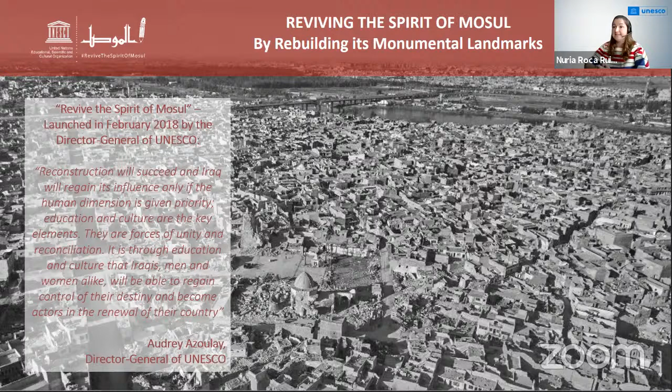There have been several webinars already in this series that spoke about this, but just to put everybody on the same page: the UNESCO initiative Revive the Spirit of Mosul was launched in 2018 by our Director General. It basically has three pillars. One concerns heritage, meaning the physical reconstruction and rehabilitation of cities' heritage sites. A second pillar focuses on education, and a third pillar wants to revitalize Mosul's cultural and intellectual life.

The project I'll be speaking about today is one of the projects within this initiative. It's funded by the United Arab Emirates and mostly falls under the first pillar, heritage, of these three pillars of the initiative. Later on, my colleague Gemma will speak about another project which also falls under the initiative Revive the Spirit of Mosul, but that is funded by the European Union, and it's different from this one. So just to clarify that there are several projects within this Revive the Spirit of Mosul.

The project I'll be talking about is the UAE funded project, entitled Reviving the Spirit of Mosul by Rebuilding its Monumental Landmarks. This project basically aims at rebuilding and rehabilitating three landmarks in the city of Mosul: the Al Nouri complex, the Al Tahera Syriac Catholic Church, and the conventual church of Our Lady of the Hour.

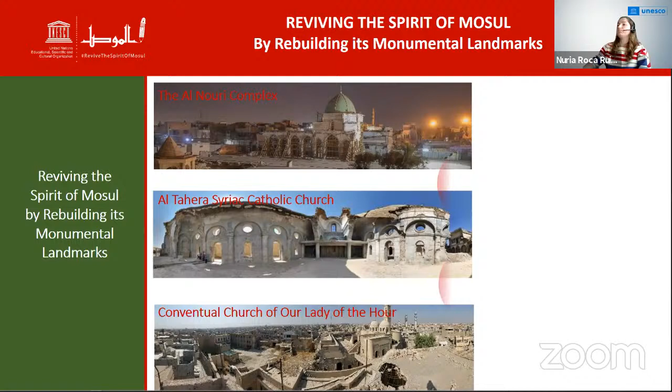It basically has two objectives, or we aim at two outcomes. The first outcome concerns the actual rehabilitation and reconstruction of historical spaces, meaning the physical reconstruction, and how this can lead to reviving the cultural diversity of Mosul, both in terms of human fabric and cultural heritage. A second outcome looks into the skills development and employment opportunities that the physical reconstruction and rehabilitation can lead to.

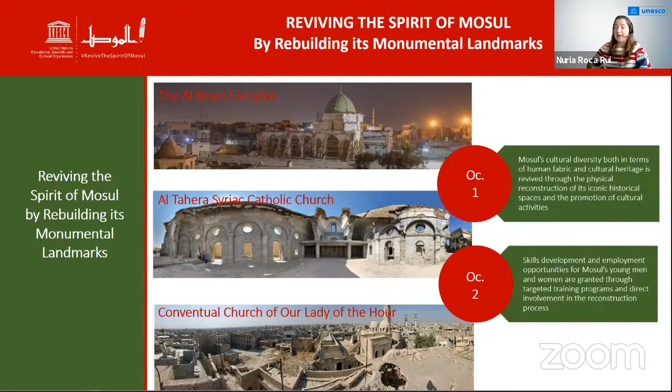So I will start by looking into the first of our important sites, which I already touched on a little with the latest slide - the Al Nouri complex.

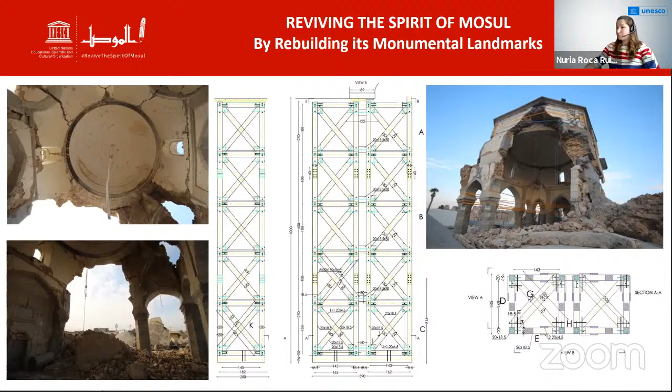For us it has always been very important to encourage job creation and to involve as much as possible local professionals, artisans and workers. In fact, these huge wooden pillars were fully done by local carpenters and woodworkers, and I have to say it was a very complex job, but they were extremely talented and successful in it.

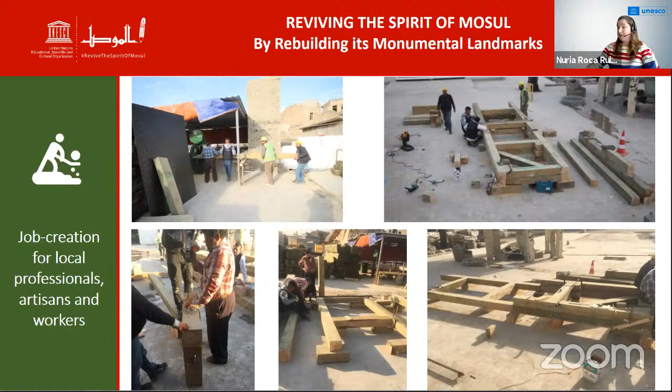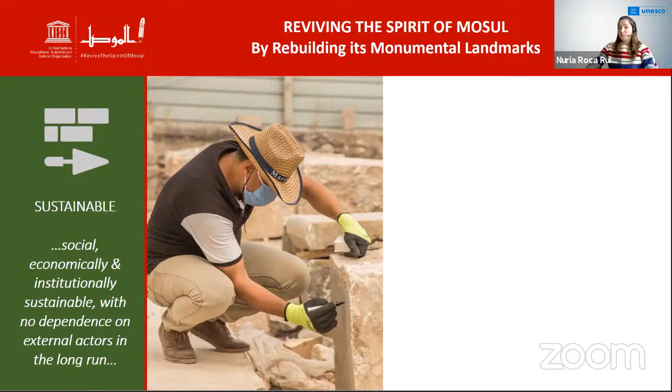Along the same lines, we also work on a daily basis with the different local governmental stakeholders, and especially the State Board of Antiquities and Heritage. You can see here some of its staff.

The SBAH, the State Board of Antiquities and Heritage, kindly deployed highly qualified professionals to the Al Nouri complex, and they did a great job screening the different fragments, assessing the historical value, and cataloging these fragments - of course, the fragments that were recovered from the rubble, etc.

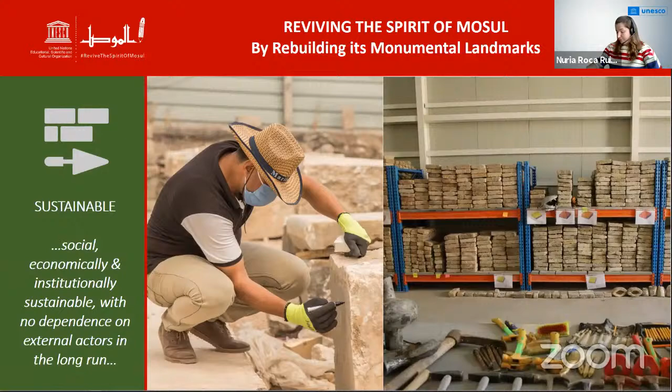And you can see in the images our storage space - a temporary structure built within the complex to host all these fragments. This is a very important step for the next phases of the project indeed.

The result, well, you can see it on the picture. I think the image is quite clear if we compare it with the first image I showed you of the aftermath of the destruction.

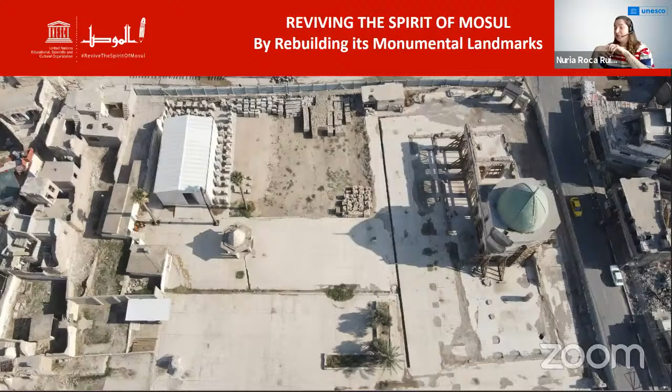Now I'm going to explain quickly the different areas of this complex and how we're planning to move forward. This part highlighted on the screen is what we could call the historical perimeter, or the original perimeter, of the Al Nouri complex. With the dotted line, we are marking the enlarged area of work, which is now the one that concerns our work.

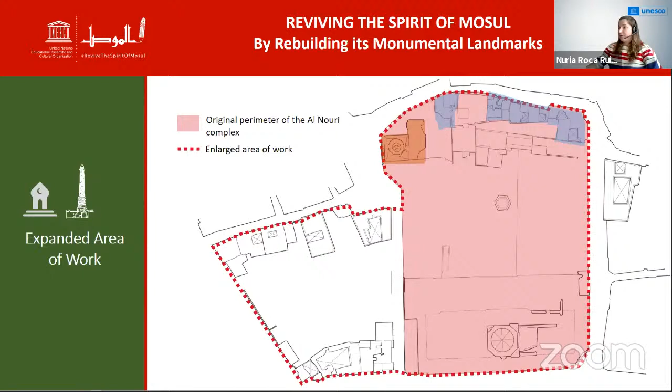In the northern part of the complex, highlighted in blue, those are some houses meant to be residential houses, currently included in a tender package that went out together with other works in the context of the rehabilitation of other historical houses in Mosul, which falls under the EU-funded project that Gemma will cover later on. Those houses will most likely be used by staff working in the complex. Highlighted in orange is the Al-Hadba minaret, which we will cover shortly.

The part that is still in white is the expansion area, currently under a plan of acquisition by the Sunni endowment. This enlarged area of work was, at the beginning of the 20th century, a beautiful neighborhood, but unfortunately these houses were mostly demolished, and only a few are standing. It was converted into a parking lot right before the destruction in 2017. That was a parking lot.

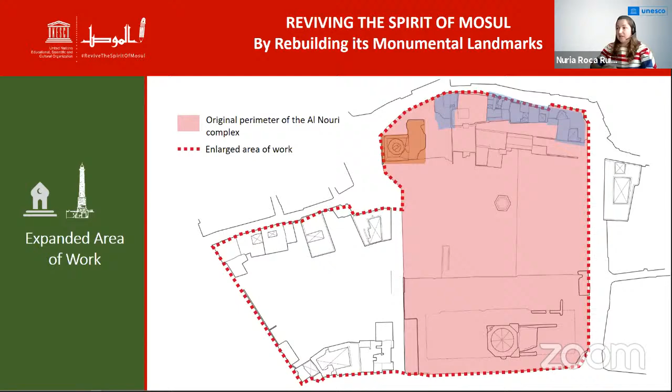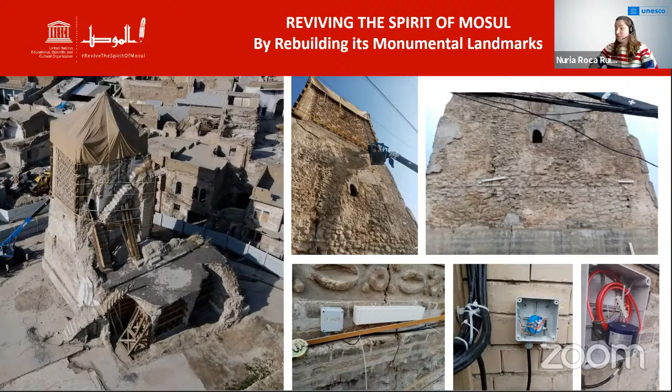So as I said, let's cover now the minaret quickly. I know I'm taking a lot of time, so sorry, but I will try to give you the most important highlights on the minaret.

On the left side of the image, you can see how the minaret looks now after phase one is completed. The minaret is now fully accessible from inside, but I want to highlight that the rubble removal and temporary stabilization was really complex, because the minaret was already, before 2017, in a severe condition of structural instability. After the events of 2017, that made it worse, not better, obviously. But through consultation processes, it was decided that the minaret should be rebuilt how it was and where it was.

That led UNESCO to conduct structural and geotechnical investigations, which are critical to understand the status of the base, and to have the tools to design and rebuild it the best possible way. So what were those investigations?

First, a monitoring system was installed, and you can see some images on the right side of the screen. Here are some graphs, I'll go through these quickly, but we can share the presentation later if anyone is interested. These are some of the graphs from the monitoring system, which monitors the movement of the minaret. I'm happy to say that since November, when we installed the monitoring, it seems the minaret is stable, and there are no major incidents or movements.

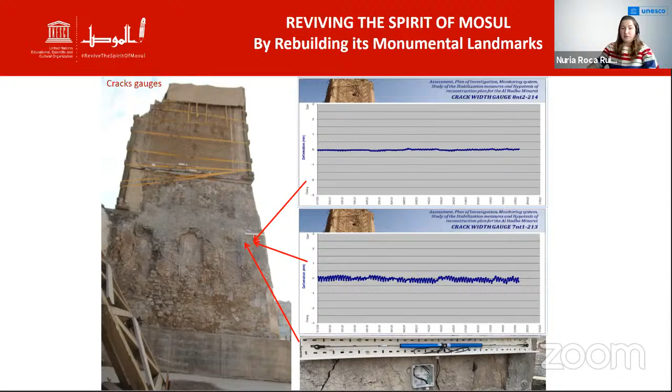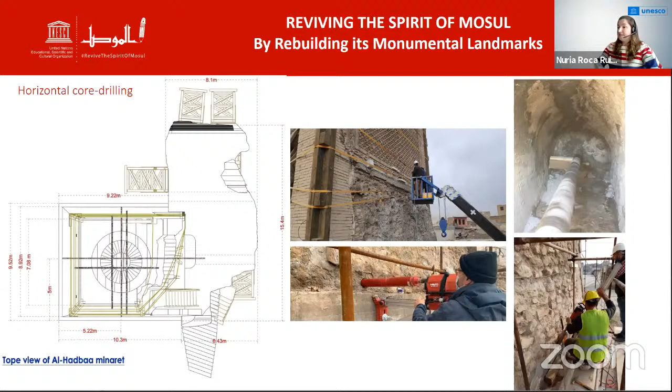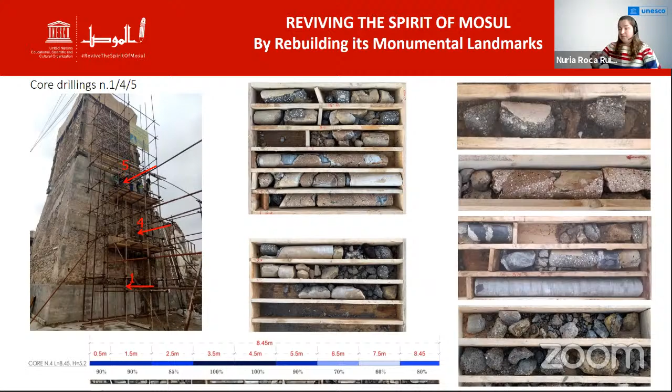The second phase of this investigation included horizontal core drillings, done to characterize the masonry stratigraphy. You can see here some images of the process, and some of the results, where core drilling was done at different levels to better understand the masonry throughout the base.

Quickly, I'm sorry I'm not going into much detail, but just to give an idea of what we're doing, these are some of the results. It's a diagram reporting the differences in terms of materials extracted during the core drilling.

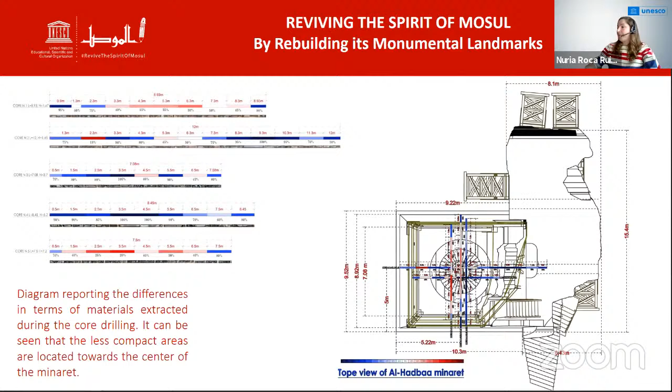The third phase of these investigations was to conduct direct investigations, because UNESCO, through desk review and consultation with local experts, was aware that there were some interventions done, especially in the 20th century, by different teams, but especially the Italian team of Fondedile. The only way to understand what was done was to conduct direct investigations.

Here on the left you can see one of the drawings of the plan for the intervention led by Professor Fondedile in the 80s, and a picture of what has been found in the archaeological excavation, these direct investigations ongoing as we speak. You can see that there were some micropiles placed on each side of the minaret, except on the eastern side, there are no piles there. This was meant to stabilize the minaret because it was already leaning at that time.

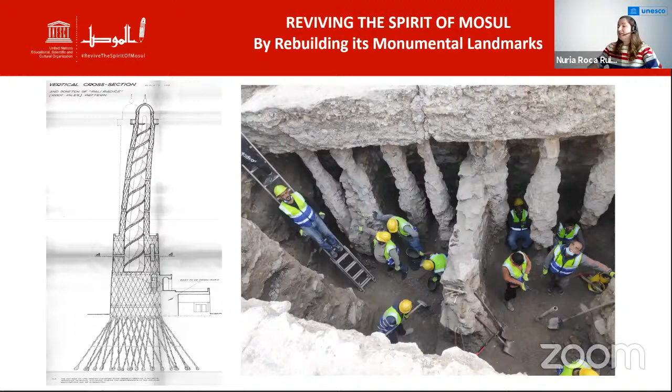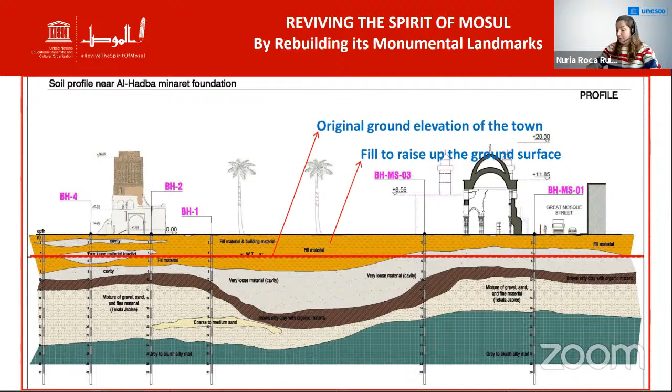Finally, we have also conducted geophysical and soil investigations, which are very important to understand the status of the remains, and lead us to the design of the reconstruction strategy.

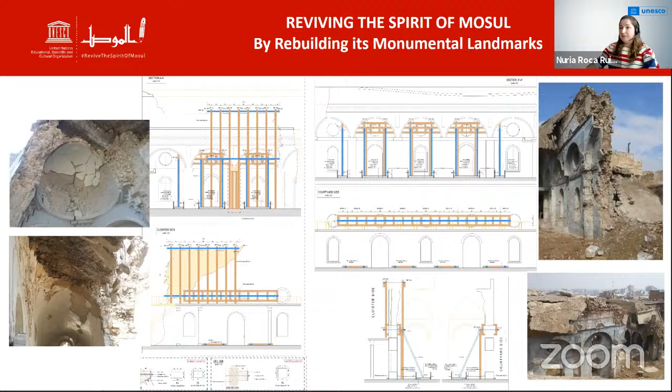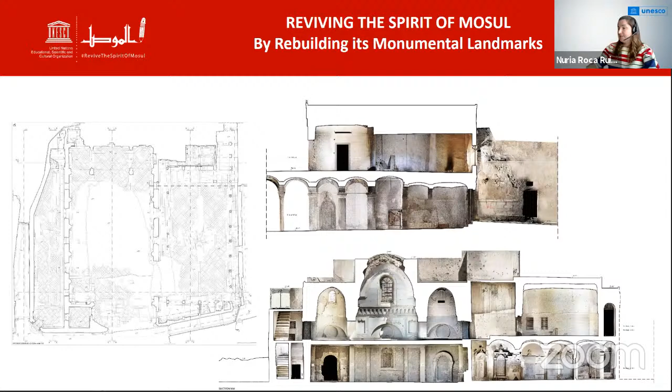As I said, the same procedure, same phasing is undertaken also for the churches. Here are some images of the Al-Tahira church, where you can see the level of damages. Here are some images of the architectural design, and here.

Good. Of course, it's also important for us to especially create a focus on job creation, but also on training and coaching. And we prioritize, of course, consultation and coordination with different stakeholders.

And we tried as much as possible, and this webinar is an example, to communicate and raise awareness about the project and its importance.

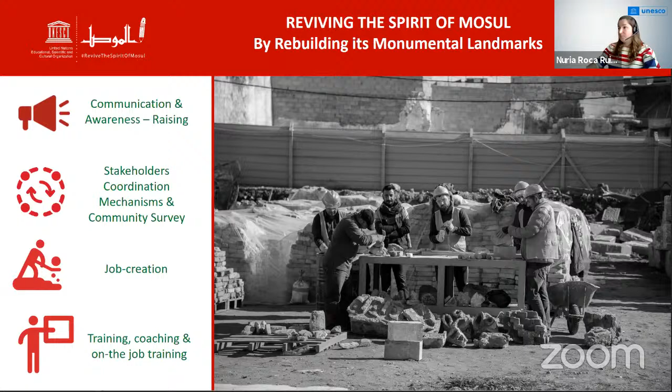We have mostly two main mechanisms for consultation officially. The so-called Joint Technical Committee, which happens at the national level and is attended by Moslawis and Iraqis, different experts in the fields of engineering, architecture, representatives from the local community, University of Mosul, and governmental institutions. And then the Joint Steering Committee, which is the higher committee, the decision-making body of the project, which includes the different ministers of not only the donor, but of course the Ministry of Culture and the president of the Sunni endowments, among others, as well as Christian endowment and the Dominican order for the churches.

These mechanisms happen also in parallel to direct and daily, almost, meetings with the different stakeholders, because, for example, meetings with the State Board of Antiquities, which operates under the Ministry of Culture, happen very regularly at the technical level between UNESCO and the team working in the field.

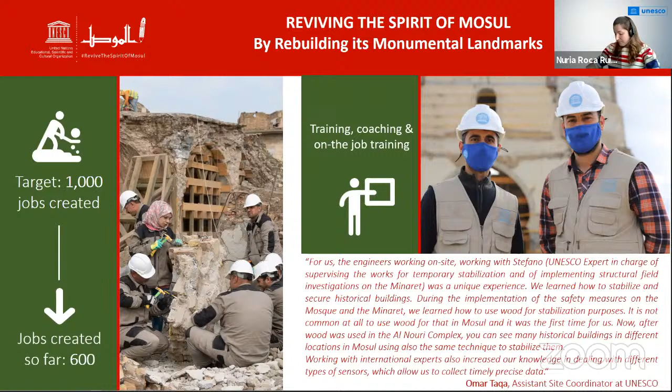Not only is job creation important for us, but also training, coaching, and on-the-job training. On this topic, I would like to highlight a young professionals program for reconstruction and rehabilitation of post-conflict built heritage, that will be launched very soon in the framework of this project in partnership with ICCROM.

This is a 2 year program with 2 tracks, one that targets professionals and another one that targets rather artisans and handicrafts. Maybe Gemma can also elaborate on this, because it's a cross-cutting program of the initiative and not only the UAE funded project. And so that's it from my side.

I will be happy to answer any questions. Thank you all, and I hope you enjoyed.

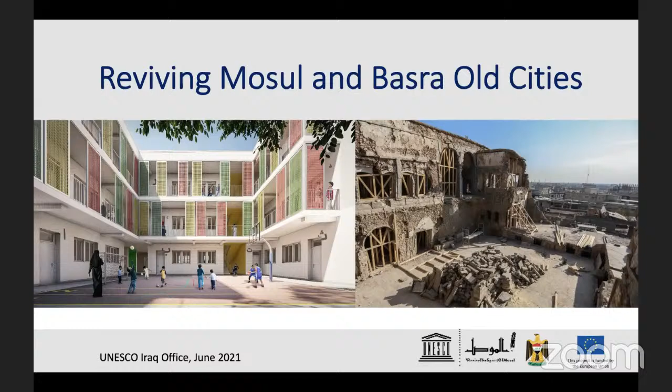So the overall objective of this project is really to contribute to economic recovery, essentially through job creation as well, skills development, and training for vulnerable youth in heritage reconstruction.

To give you a background and show you the context, between 2014 and 2017 was one of the largest urban battles probably since the Second World War, which took place in Mosul. This resulted in mass destruction, affecting around 80% of the city's physical infrastructure, with an estimated 5,000 buildings in the old city of Mosul completely leveled or severely damaged. So that meant there was a significant loss of integrity within the historic core. However, there is still much remaining in which to rebuild, and we want to preserve the integrity and historic character.

The old city of Mosul is actually on the tentative World Heritage List as well, so we also want to preserve that character as much as possible.

We initially started with a detailed analysis of the old city to understand the architectural features and characteristics of the houses specifically. The study revealed that most of these houses date back to the early 18th century. However, recently we actually found a stone integrated within one of the houses from the Atabeg period. So that's quite interesting.

So the houses reflect a lot of characteristics of Islamic architecture, which really respond to climatic conditions, social requirements, religious principles, and economic conditions. The study reveals a lot of hidden features and highly decorative elements that were inherent in Mosul. One of the main features we are looking at is the use of alabaster marble, which is used to frame various elements such as doors and windows, etc. So you can see the level of density and destruction from the picture on your screen.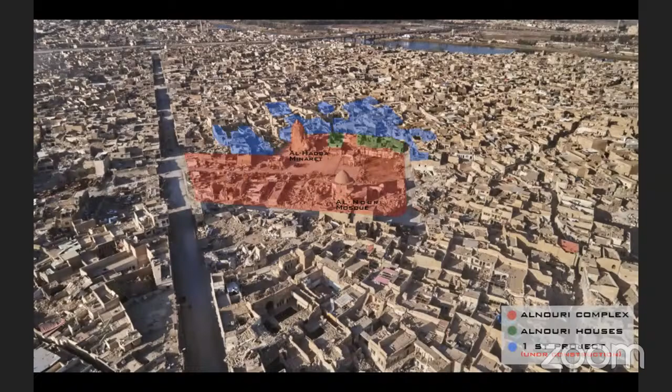So with a better understanding of these architectural features, we started to think about where it was within the old city itself that we would work. So we decided to start with the area surrounding the Al Nuri complex, which we would refer to as an area like a super block, for example.

The Al Nuri complex is in red, and all of the blue is our current first phase of our project of 44 houses, with an expansion coming in the next few weeks that will continue on in a more heritage route. It's important to say this is not a shelter project, but a development project that is quite unique to UNESCO, as we're actually reconstructing the entire house, unlike other agencies who are working on core shelter. It's also important to mention that we're not just looking at the historical house itself, but also upgrading the infrastructure around the house.

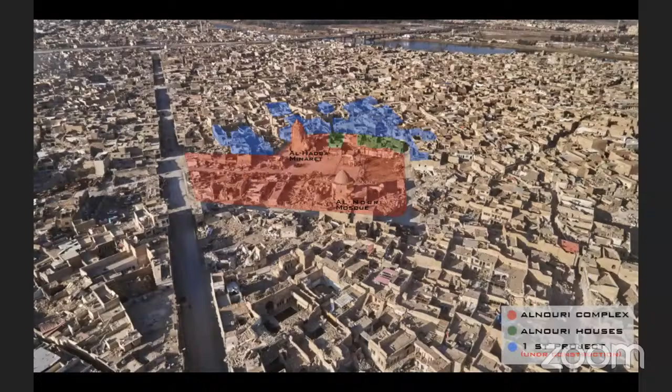So we're looking at the water network, the electricity network, the sewage, the drainage, the paving and lighting. It's not just the houses themselves.

So we face quite a lot of challenges with regards to the sheer amount of destruction and rubble. Unfortunately, we find unexploded ordnances, we at times find IEDs, and unfortunately, morbidly, we do find occasionally some bodies amongst the rubble. And this all has to be cleared.

In some circumstances, even some of the roads need to be cleared before we can get in to do any assessments. This picture shows you the level of density that we're dealing with, but it's important to understand that every site has a unique set of circumstances, and our approach at UNESCO for the houses is very much tailored to the individual needs of each.

The work is complex in terms of the level of damage, and it's not just the damage that's been done as a result of the conflict, but also the degradation of the buildings themselves. So the high density obviously is an issue.

We are using construction techniques to match the old, but have in some ways been forgotten about for generations. We also have modern interventions that have been knitted in as well.

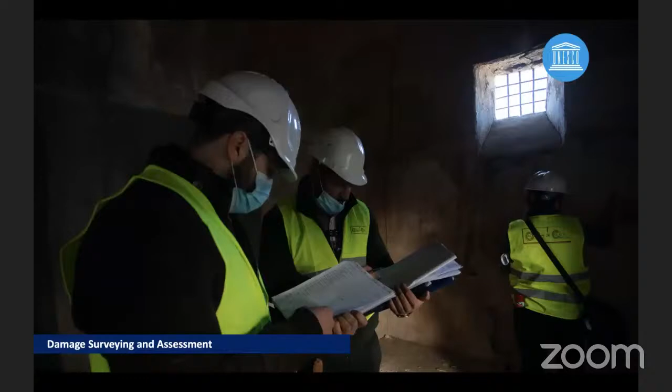Moving on, once the buildings are clear, we can safely get in to do our detailed assessment and analysis, in which we start to categorize each of the historical houses into a damage category. So we'll reconstruct in most cases, unless the house is either completely eroded or completely missing.

Most of these houses surrounding the Al Nuri complex are mostly privately owned, and some are owned by the Sunni Waqf, some are owned by the Antiquities Board. Each detail of repair is discussed with each owner.

For example, with the homeowners, they also are able to choose various options of historical features and the reintegration. This is also further discussed at a local technical level with government stakeholders such as the Antiquities Board, Governor's Office, Water, Sewage Department, Electrical Departments, prior to even going to a tender release phase.

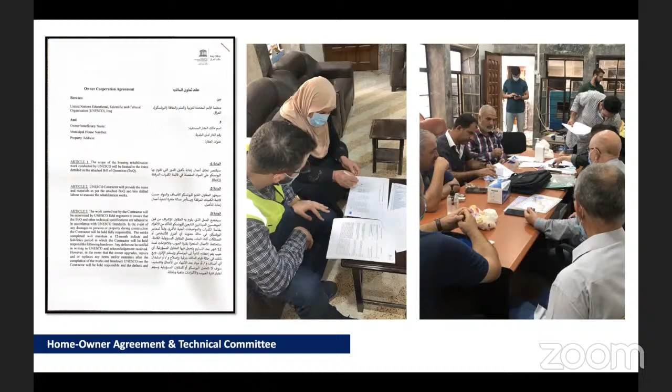So we started the construction of the first package of 44 houses back in December 2020, and you can see some of the photographs of, for example, the old plaster layers being removed, the stone being rebuilt using lime mortar, and some of the domes starting to be reconstructed as well.

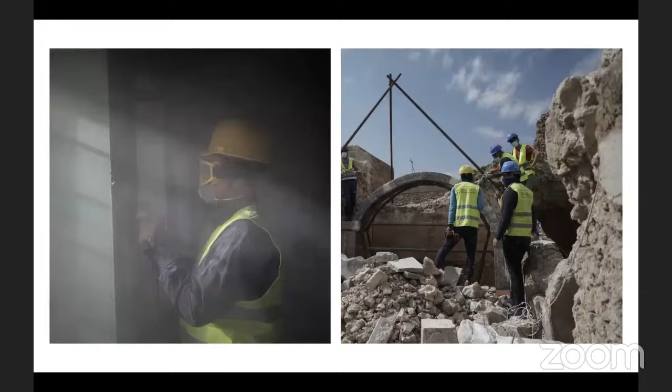These pictures show some of the alabaster elements that are quite special for Mosul. A lot of these elements, unfortunately, over time were covered up or painted. So we're actually revealing a lot of those alabaster components again and celebrating those really unique architectural features.

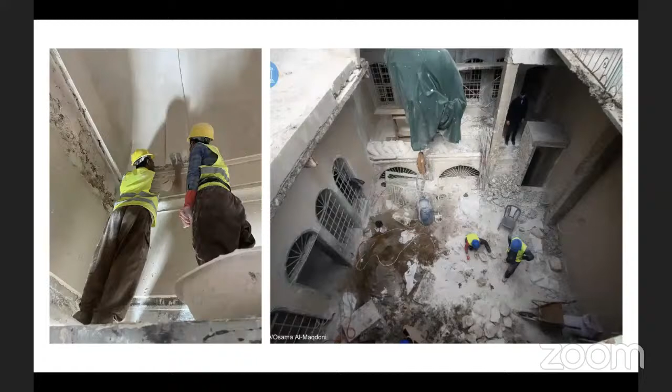This is simply a photograph of typical Islamic architecture, in which everything is based around a courtyard, and most of the houses are quite insular facing, with the external facade having not a lot in terms of windows or openings.

This shows some of our team mixing the lime mortar and then redetailing some of the plaster elements.

You can see some of the trainees have been teamed up with specialist craftsmen to understand and undertake the work themselves. In the picture on the right, we have an expert alabaster craftsman who is filling in some of the damaged parts in different stages.

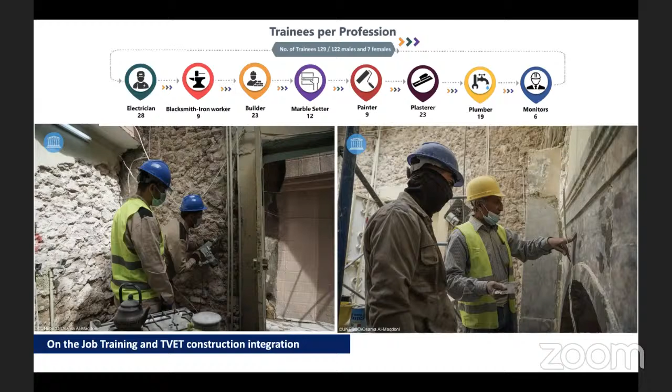So he's teaching some of the local qualified TVET trainees how to do that. You can also see some girls, some of the ladies, have also undertaken the training course and come on site as well. Our electrical engineer was teaching them how to do electrical wiring throughout the historical houses.

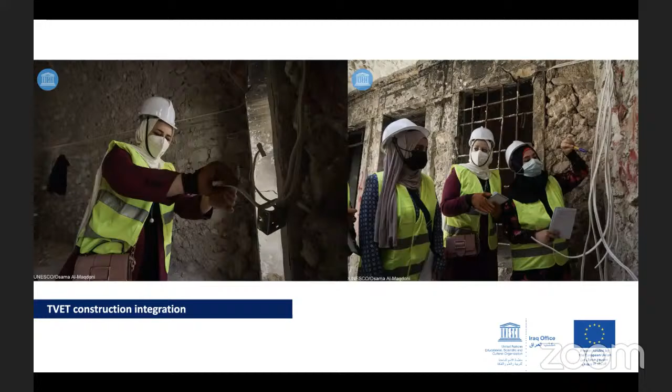I think this is a really good photograph to explain what's happening in detail. Again, some more photographs of our TVET trainees hand mixing some of the lime plaster work and learning how to do some welding on site as well.

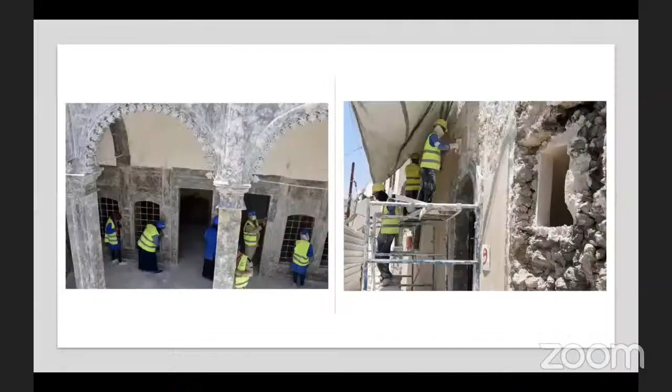You can see in detail here on the left photograph, this is one of our really nice examples of historical houses that has quite a lot of alabaster marble, and a lot of the TVET graduates are starting to repair in situ. This is a bit different in that it's repair in situ rather than replace. This is an interesting challenge that hasn't necessarily come up in construction for Mosul as yet.

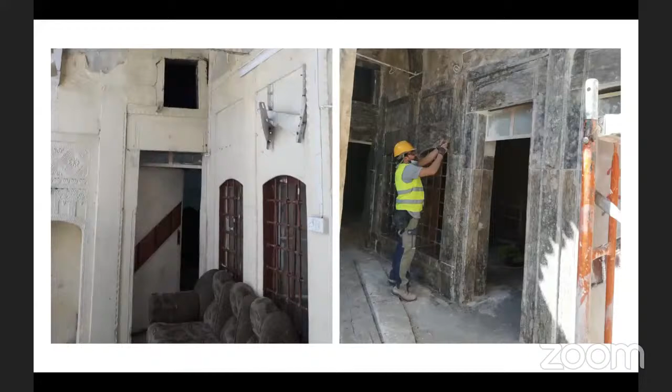This shows you a before and after photograph of how the beautiful historic alabaster elements have all been covered up by paint and various bits and pieces and plaster.

The photograph on the right shows after, in terms of under construction, and we hope that a lot of this construction will finalize by the end of the year. Again, another before and after photograph where you can see all of the really nice architectural elements had been hidden, and so we have started to reveal them and replaster.

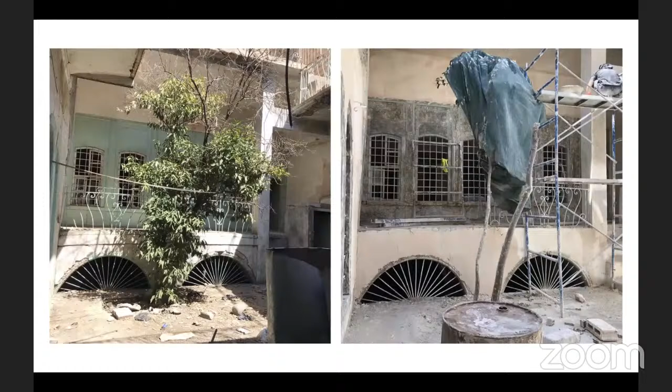We also have a couple of palatial houses which are owned by the State Board of Antiquities. At this stage, they are incredibly large houses that have gone through rubble clearance and a stabilization process, but you can still see the level of damage there. Any elements have been catalogued, ready for reintegration again. So those are going through a stage of design at this moment prior to releasing for tender.

This takes us towards some of our other elements as well, which include a child-friendly school, and in some ways it creates a heritage route. Some of these houses have obviously been reconstructed by other agencies, so we're working in different phases with the European Union to achieve the results we want.

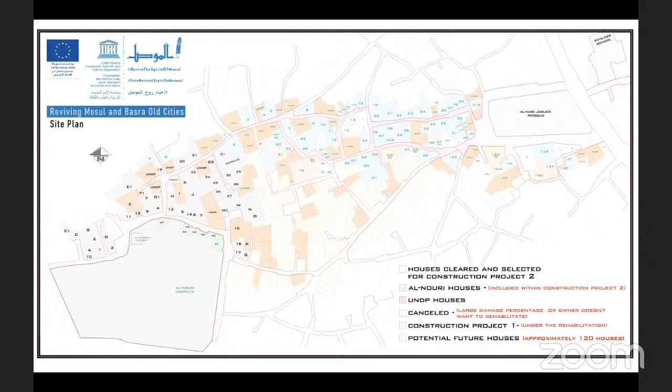The child-friendly school. This is the first child-friendly school in Mosul and potentially all of Iraq. What makes it a child-friendly school is that through the architecture we're able to actively reduce violence and increase academic achievement of children. Essentially, we're breaking down all the components of a typical school in Iraq.

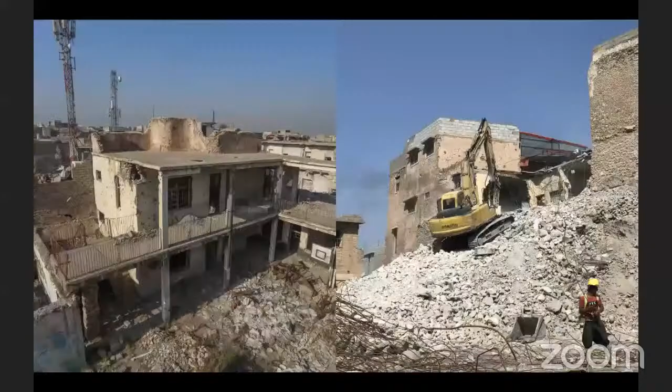We focus on various elements such as classroom size, ventilation, thermal comfort, organization of spaces, providing areas for active participation and learning, having dedicated classroom spaces, and essentially it's just a good school design that is fully accessible and earthquake resistant. So just to show you, the school was more or less fully destroyed.

You can see that the school on the left is what was existing. The picture on the right shows some historical houses that were actually held up by the school. So once the school was demolished by hand and cleared, we had a whole site challenge with stabilizing an entire cliff before we could even start with the reconstruction.

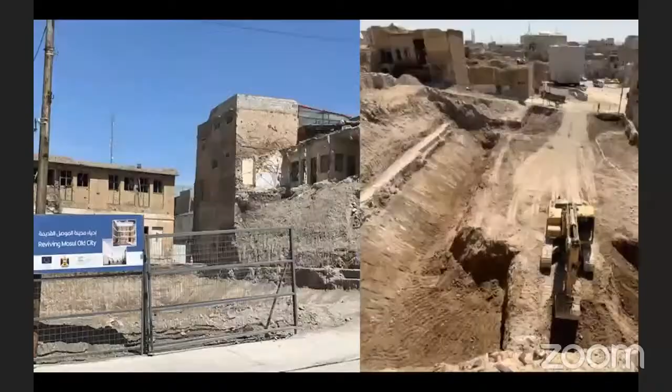You can see from some of the photographs where we stand now, the stabilizing of the cliff and backfilling has started, so hopefully in the coming weeks we'll be able to start laying our foundations. But some of those houses on the left that were totally unstable, we relocated some of those residents until the school was underway and everything was safe.

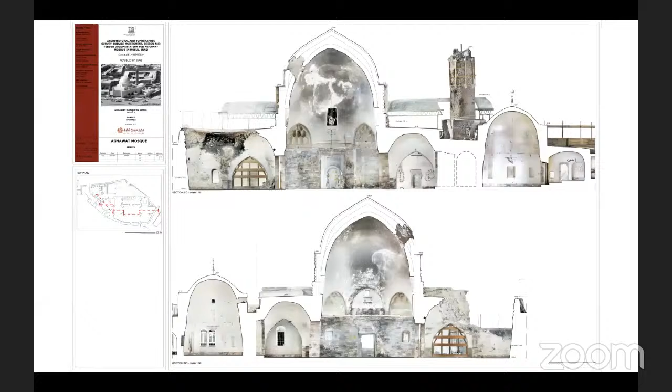In addition, I also have Aghawat Mosque. You can see the photograph of the destruction before. We've gone through the process of removing all of that rubble, and we've started to stabilize a lot of the structure and the minarets, and we're now in a stage of design. We've completed all our assessments and we're in a stage of design prior to tender release.

But really, I just wanted to finish with a photograph of our team in Mosul. We've a really fabulous team that has worked tirelessly to create the best outcome for their city.

The EU team are really ensuring at every step that the voices of the people in Mosul are heard, from the local government all the way through to beneficiaries and stakeholders. So this really is their project, and the outcome, we hope, is one of quality, which, to be honest, is really thanks to the dedication and hard work of a really wonderful team that I'm really proud to work alongside. So that's it from me.

If anyone has any questions related to the EU project, for me, that's fine. And also for the UAE, for Nuria and Paula.